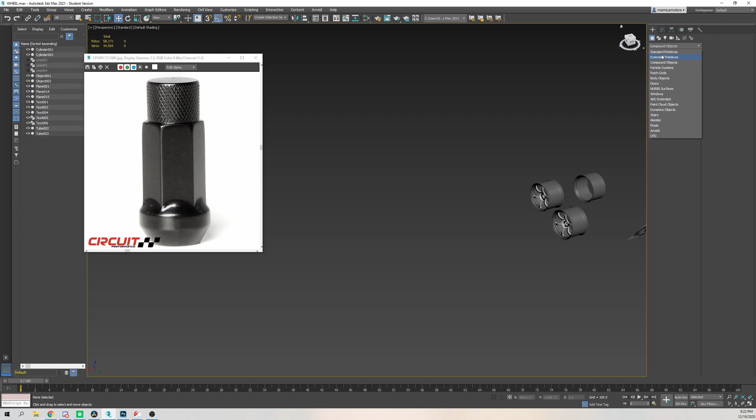Today we'll be modeling a lug nut for a wheel for a game asset. So first we'll be starting with a cylindrical shape, and we'll be making the base, the middle, and then we'll go to the top. So we're gonna grab a cylinder, create it, and then we'll immediately convert it to editable poly.

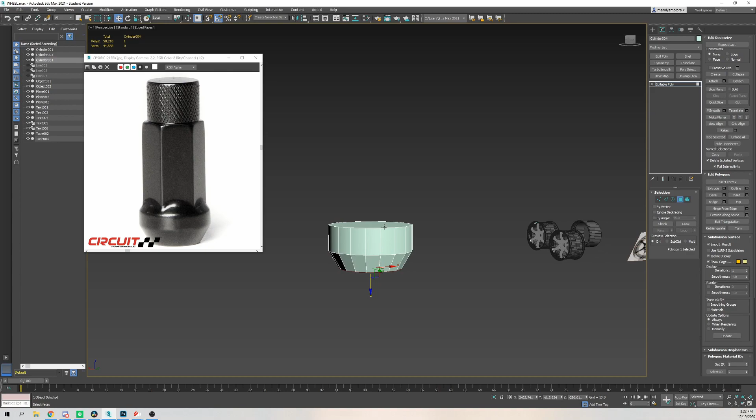Go ahead and bevel out the bottom here. We're gonna extend it, and then we're gonna bring it in. Hit the check mark, extend out just a slight bit more, and so that base is, we'll call that base, we'll first do the bevel on the top as well.

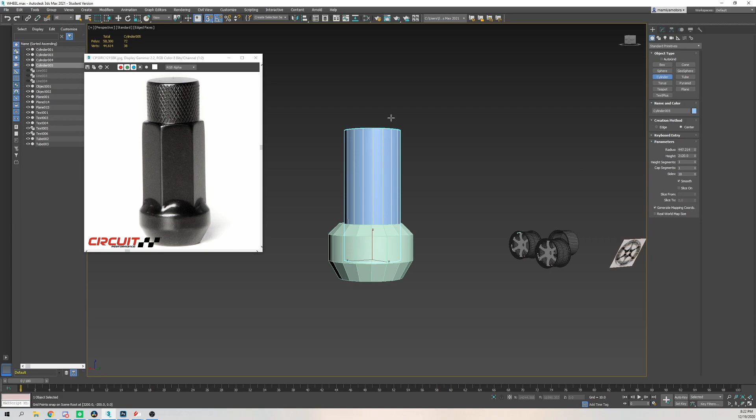Now we're going to be making the main shaft, I guess. We're going to hit Alt A, align it to the center of the bottom part that we created. I had snap on, so just hit S and that will deactivate snaps. Or N, I forgot which one it was.

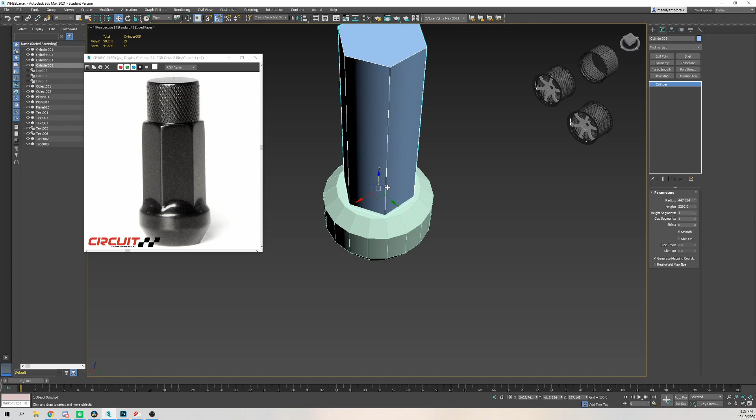We're going to reduce the number of sides to create this, about 6 sides. We're going to scale it to about the right size that we need it to be. Don't worry about the height of it right now, we'll go and scale that down later on. Get into editable poly, select the edges. Right now I'm just kind of testing out what the topology might look like.

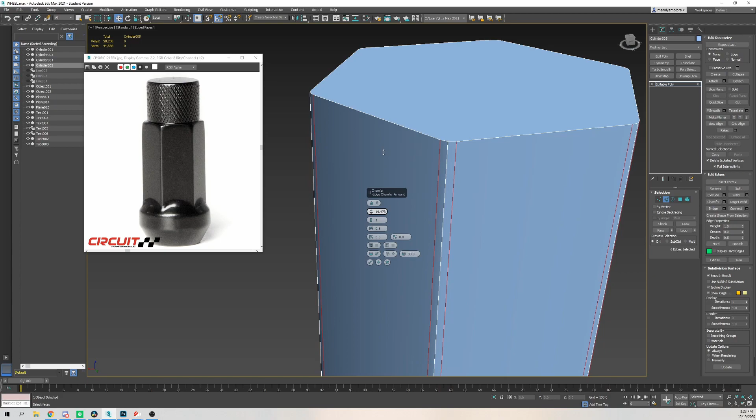You'll see me kind of go back and forth between seeing if I want to just do the sides or also chamfer the top. Being a game asset, we don't want to make it too high poly for something such as a small object. What I'm going to end up doing is getting rid of those chamfers.

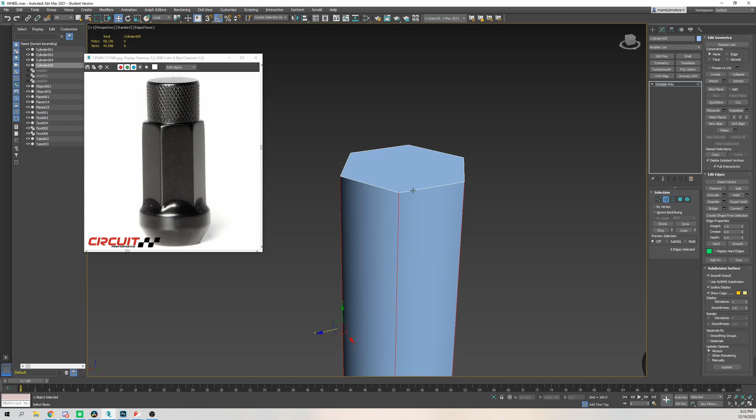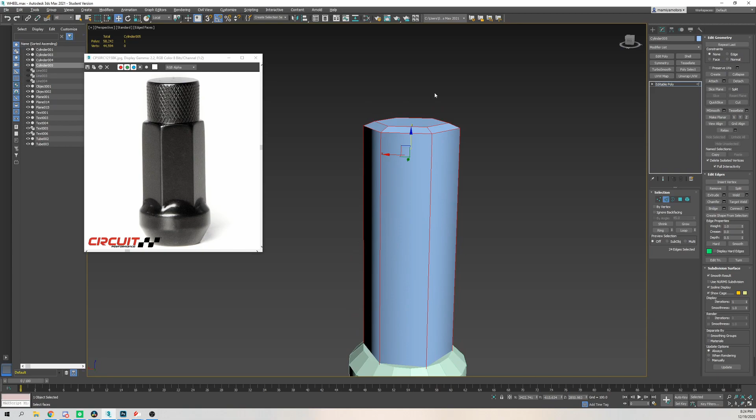We're going to first select the top. We're going to bevel the top, extrude it upwards, and then bring it inwards. This will create that kind of rounded top. We're going to select all the edges that we want to chamfer to make it nice and smooth looking, just so it's not so edgy.

Want natural edges instead of, you know, fake blocky edges. So chamfering really helps with a lot of that. It does add some polys to it, but it's not too much.

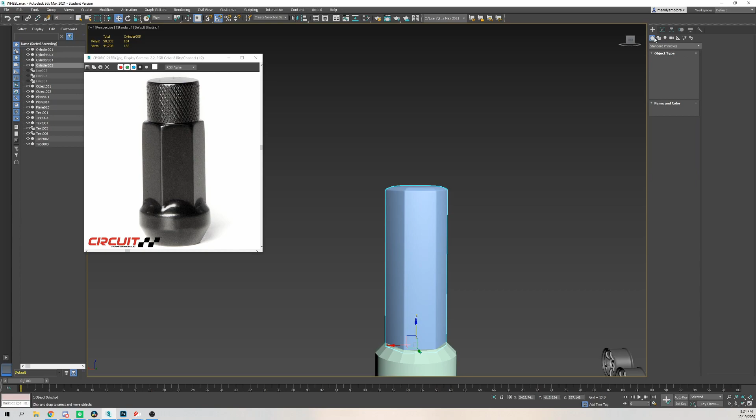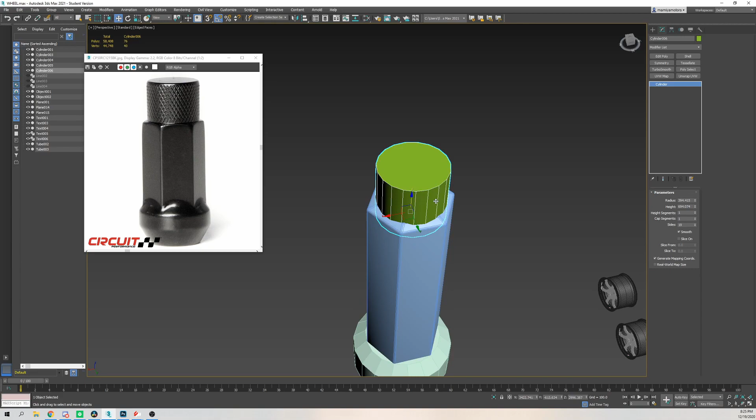What we're going to do is go ahead and create the very top portion. So we're going to do the same Alt A to align to the shaft part. We're going to go to our modifiers, increase the side count to a higher number so that way it's nice and smooth and round. We're not going to worry about the texture of it in terms of the rough metal texture. We're just going to keep it smooth.

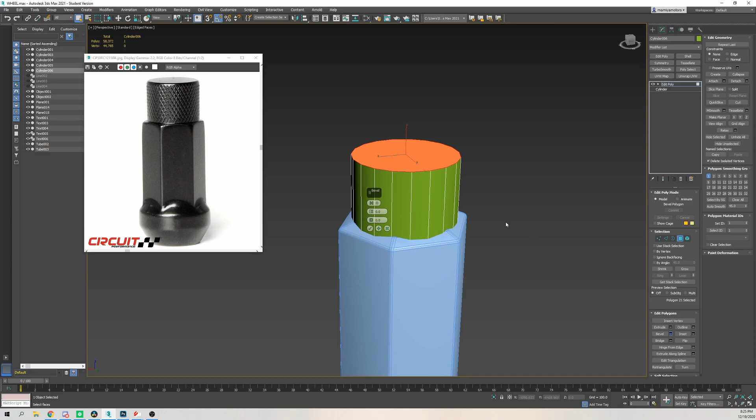This picture is more of a reference as to what it would look like just in general. The one that I'm actually doing, it's not a very detailed picture that I have, so just kind of going off of general knowledge of what they should look like and then getting something similar.

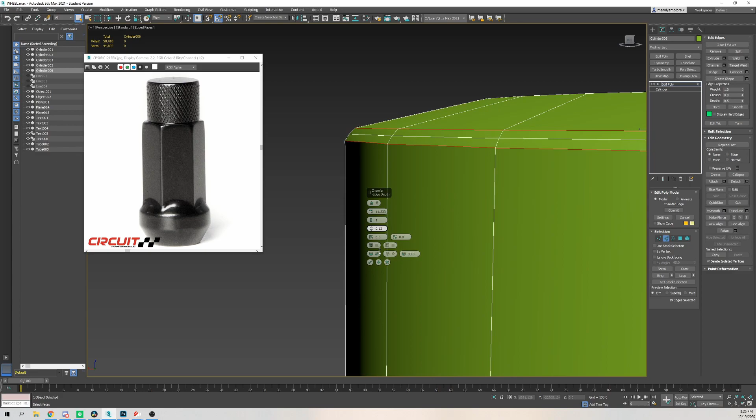We're going to go and inset into the center, that way we create an edge that we can chamfer to make it nice and smooth. I would recommend bringing that depth number down below 0.5, that way it's not so angular, creates a nice rounded face. What we're going to do is actually just flatten out the top here instead of having it rounded.

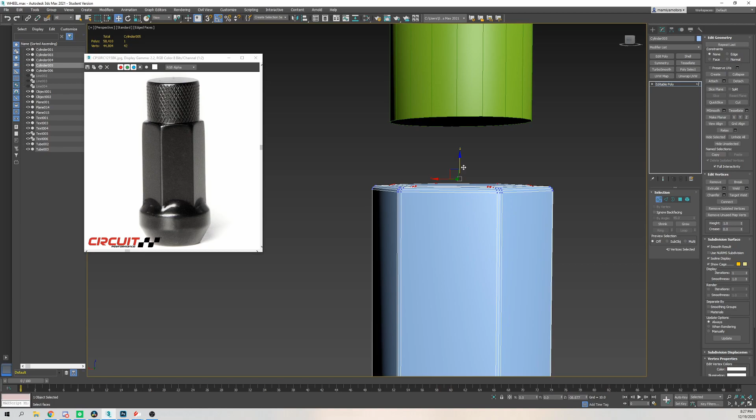Now the gizmo was kind of on a weird angle, and I realized the selection was on local. We want to make it on view. We're going to make it flat and then bring the very top piece back onto the top.

And so now it'll just be a nice even surface for it to rest on. Nothing complicated here.

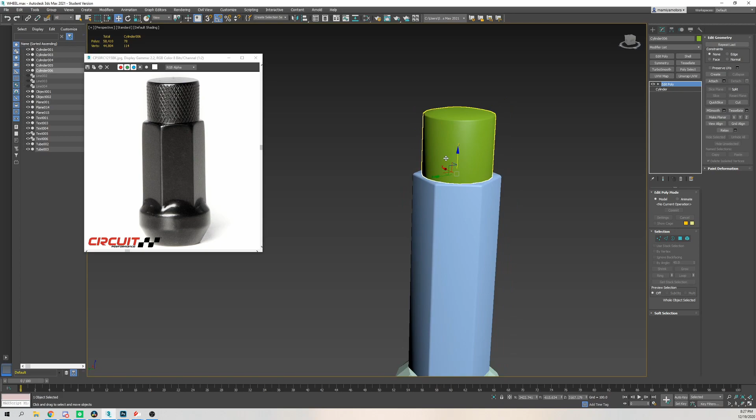Alright, so now we're going to grab this center polygon. We're going to scale it up a tiny bit, then extrude it inwards. That way we create that hollow center.

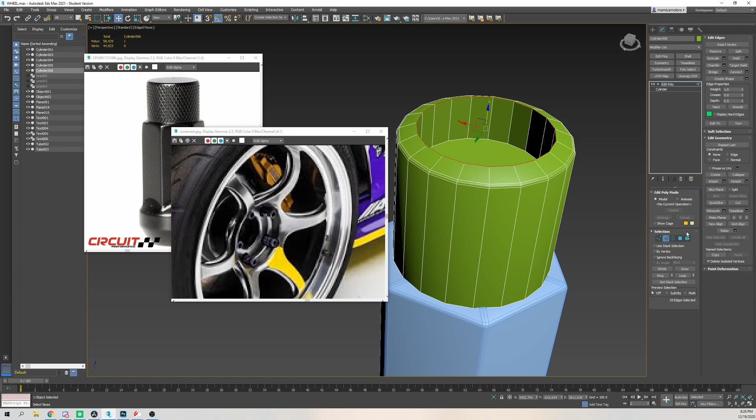We're going to grab the edge of that inner edge and look for chamfer, which I for some reason could not find for the life of me. We're going to increase the value. We don't want it too round or too sharp, just because it is a fairly small object. We don't need to make it an insane amount of smoothness or detail.

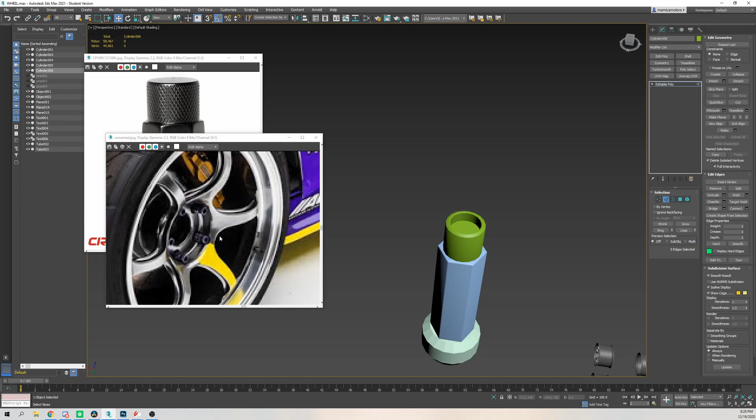Just when people zoom in onto the wheel, it'll still look smooth.

We're gonna smooth this out using smoothing groups. So I hit clear all and then auto smooth. But I realized it's too smooth and not enough edges, so we're gonna select just the bottom, take it off smoothing group 2, and put it on 3. That'll separate the smoothing groups between the middle, and the same thing for the very top portion, so it gives you that separation of faces instead of looking like one blob.

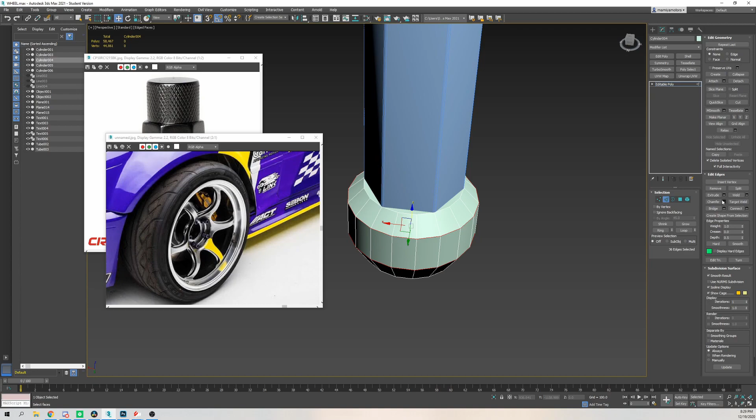We're gonna grab these edges and chamfer them so it's not so angular. Give you that nice sheen on that corner, more realistic.

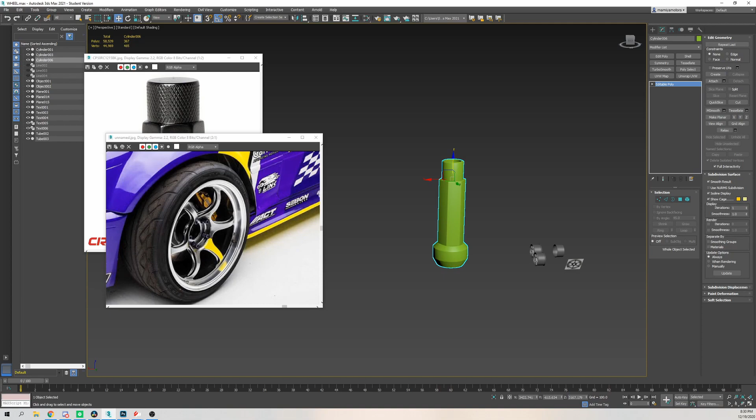We're going to attach all 3 pieces together using an attach tool, and we're just going to change the color.

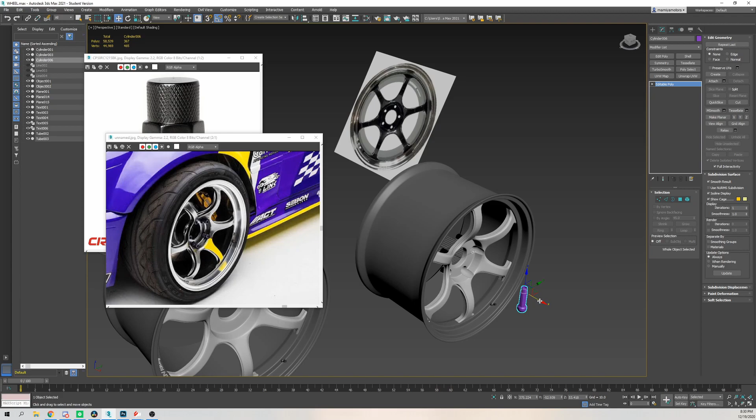Okay, I didn't really like the green. Now, this color isn't the color that will be in game, so don't worry about what color it is here. If you were to render a scene inside 3DS Max, then these colors would matter, but if you're just putting it into the game, then you don't need to worry about the color inside here.

What we're gonna do now is set an angle snap to about 90 degrees, so it quickly snaps to the degree I want it to.

We're gonna center inside the lug nut hole in the wheel that I made - it's the Advan RGD2. This is where we're gonna scale it down so we have the correct height that we need.

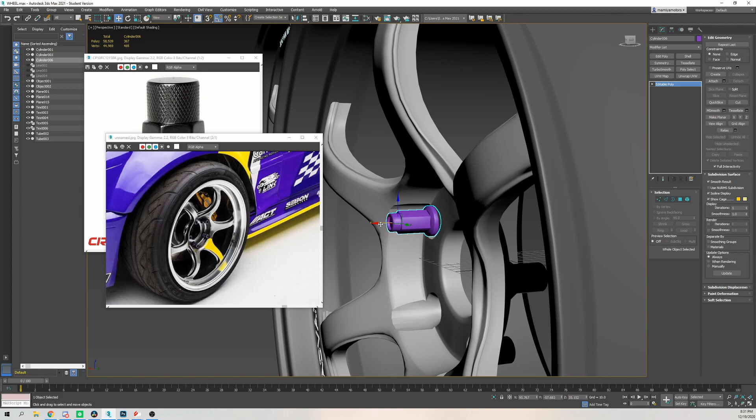This will also kind of flatten out the base too, so be careful when you scale - it does scale everything. So you can either grab vertices and just push it in, or you can do this method. This method was just easier, and I didn't really need the base to be that long, so this was a better route.

So now that I have the one lug nut in place, what I'm going to do is either hit insert or go here and affect pivot point only, and then position the pivot point to the center of the scene, which is also the center of the wheel.

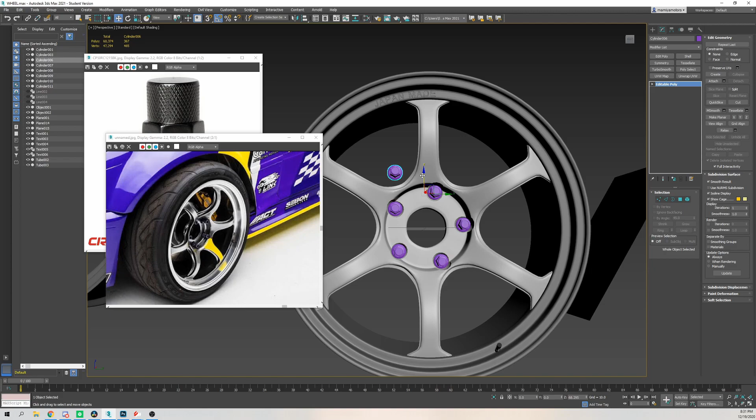And then we're gonna do angle snap and snap it to 72 degrees. If you hold shift and then rotate, it'll snap to 72 degrees, and then you just do it by 5, and that's it.

Thanks for watching, everybody. I hope you found this helpful. If you have any more objects you want to see me model, let me know in the comments below.